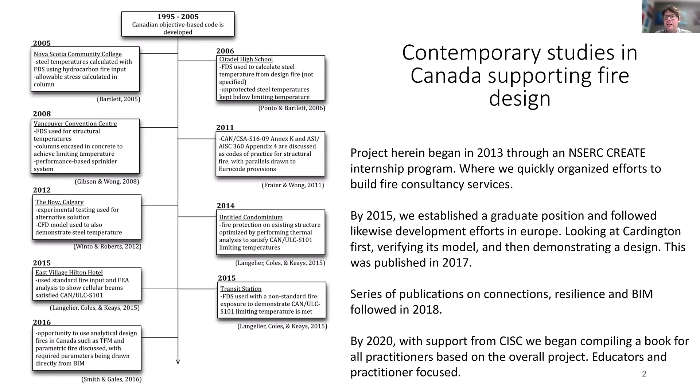So the Canadian Institute of Steel Construction wanted to have basically a textbook created that was basically, here is how you interpret the current codes, here is what you could do with these current codes, and here are some examples of how you could go about doing that. And that's basically when Thomas reached out, it just so happened we use SAFIR to do our examples that would be used within this resource. And the resource has just been submitted to the publisher.

The contents are basically here, and what I'm going to talk about today is a lot about competency, because in the Canadian system, we have to get our engineers up to that level. And then I'm going to talk about the examples we chose to include within this book. So I'm not going to go through the whole book, but it is more tailored towards Canadian engineers and Canadian students. But there's certainly things that you can take away and use internationally.

To talk a little bit about the Canadian Code itself, when we're dealing with steel structures, we're dealing with a standard that's called Annex K, which is actually a mandatory component that you have to follow. I already mentioned briefly that when we do our objective-based code, essentially we have to be in compliance with the prescriptive code still, but we can create an alternative solution.

Basically, we can have something that meets the criteria. So a simple criteria that could be checked is like deflection, the expected deflection that would be coming out of the prescriptive requirement. Are we meeting that in the performance requirement and such?

And one of the examples that I'm going to show today too, this doesn't necessarily mean that you're cutting back structural fire protection. In some cases, it actually means that you're going to have more, which is one of the examples I'll show that comes out of this particular framework.

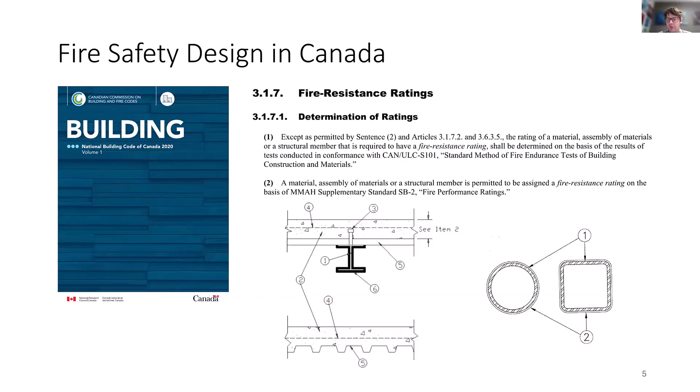The challenge that comes with the Canadian Code, and one of the things that I always get burned on when I do academic papers, is they're saying, why do you keep comparing to the standard fire? And if you've read some of the work that I have about the standard fire, you'll know that I'm very critical about it, but we still have to show that as one of our comparators when we're running the analysis under the system. So the standard fire is something we have to work with. We can use other design fires, but we still have to use the standard fire as our baseline.

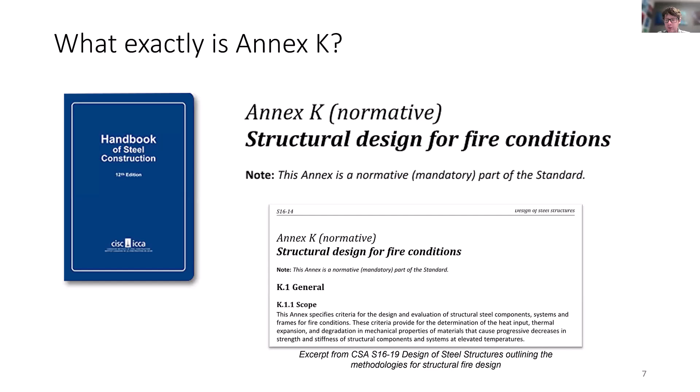So there are a lot of aspects to that. So Annex K is within our steel handbook, and it lays out the procedures of what you can do for Canadian design and the particular bouts of theory that come through. The good news for international people looking at our standards is they're highly based, at least on parameters that come out of Eurocode. So the principles of material factors are all coming from there.

The challenge with the design basis fire that we're dealing with is it is very prescriptive with the standard fire, but it does start getting into parametric fires, and there's a little bit of allowance to be thinking about traveling fires. When we look at the design requirements, there's simple methods that there is some guidance for, and then there's advanced methods. But the annex doesn't tell you how to do it. It just says this is what you have to meet.

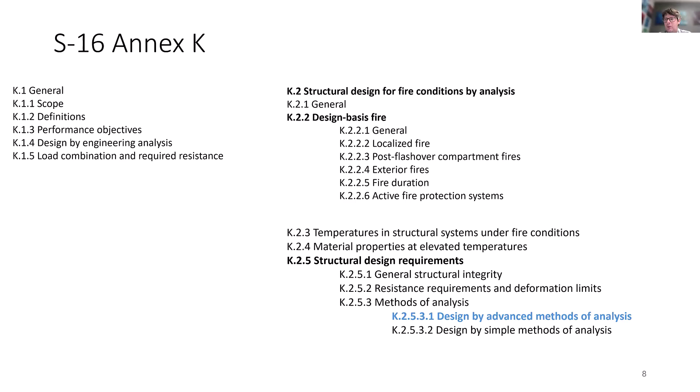So when it comes to promoting fire design in Canada, that's particularly why there's interest by the industry to have published examples of ways that you can do advanced methods. And I'm not going to talk about the simple methods that we've put into the book today. They're very basic, how to do a truss member, how to do a column or something. When it comes to advanced methods, you're getting into membrane actions, bilinear columns, which is the focus of what I'm going to go into today.

We could take a lot of inspiration from the US because there are a number of equivalent resources over there. The challenge that we have in the Canadian system with steel structures and design is it's not necessarily the same motivators for steel that are in the US. We do like to be different, as you would have heard in the news in Canada. And there are different steel trends that happen in a lot of our communities that aren't necessarily the same. There are overlaps with it, but we were trying to make something Canadian specific when it came to this.

So we use SAFIR. And why did we use SAFIR? This decision was over 10 years ago. We started this project in 2013. We sent multiple emails to Thomas asking for advice about using the software as we were going through this journey. And we use SAFIR particularly because of the text inputs and outputs that we could be generating with this, because we had an eye on integrating some of this modeling with building information modeling. I wish we could have gotten far with that, but that was one of our early goals, is we wanted to see if we could keep things open from it.

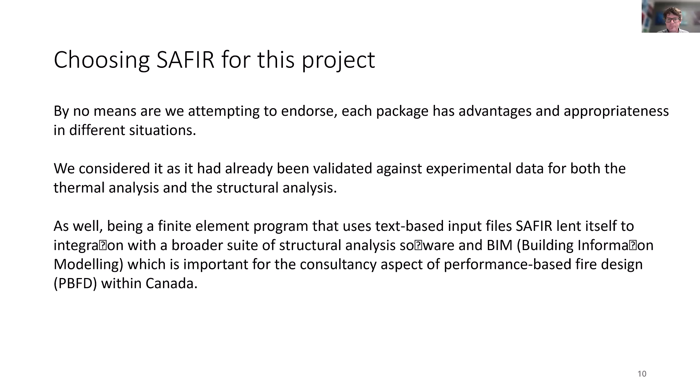So that's why we went this route. And it's not the only thing that you can do with steel structures. The first thing in our book is a benchmark exercise that we use SAFIR for. And a lot of Canadian practitioners really don't know anything about Cardington.

So we illustrate membrane action within the book using the Cardington data. And we illustrate to the practitioners and students that a lot of this data is freely available or can be obtained. So it's not out of reason for people to be trying to do their own verification and validation.

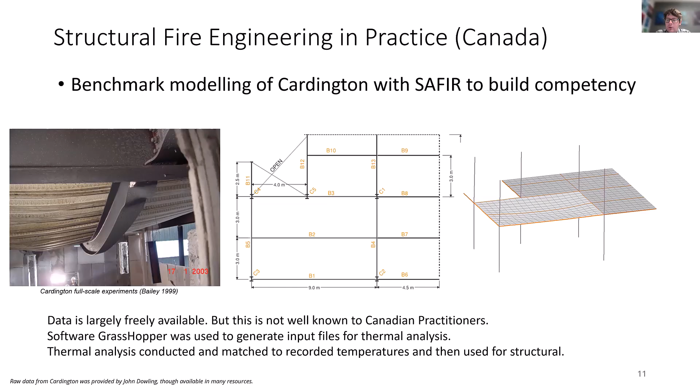It also allowed us to really go into an aspect of what is actually different between Canadian design of a composite flooring system to what you would see in Europe and maybe even in the US. And we have a very different type of rebar mesh that's utilized in Canada that does have implications or potential implications to membrane action. There's a different type of shear connection that comes from the composite system, and even the concrete type is usually very different when it comes to these systems.

So we use the European data, the material data that is coming out of Cardington, and we run a verification validation exercise for people to go through using SAFIR, walking people through step by step of how you would do this analysis. We used one of the corner tests to do this illustration, and we looked at displacement.

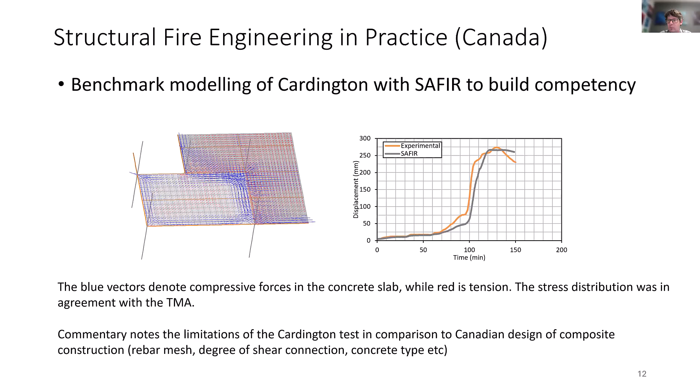There's many things that you can be looking at for acceptance criteria, but for our examples, we kind of focus in on particular acceptance criteria just to show these ones. But there's way more in the actual design that you would look at. We then take it further. We start there, and then we try to show an advanced method.

And this was actually a building that was going to be developed in Toronto. And we selected it as a demonstration exercise because it had principles that came from the UK. It was a British architect who designed the building, but the fire design was a prescriptive solution. There was no performance or objective design in reality. So we knew that you probably could use that here.

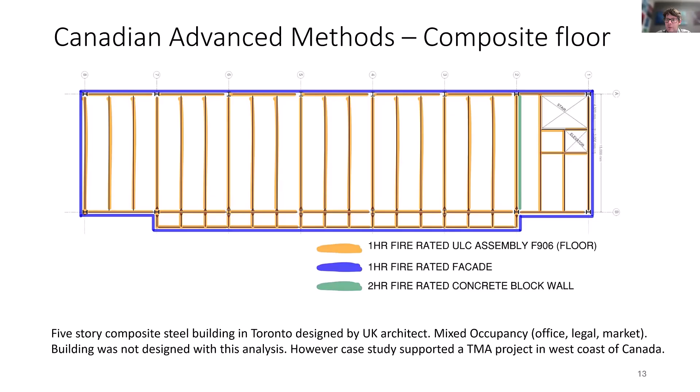And we wanted to demonstrate what would happen if the secondary members of this particular floor plan would have no fire protection coating. What would that mean to the deflection and connection forces that would develop in this particular one, and then show a demonstration of membrane action in the system.

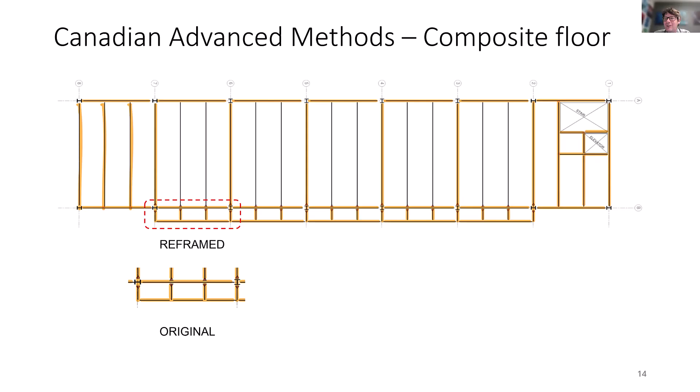It was a very lengthy steel beam. We're talking about a 15-meter long steel beam, so the deflections that are going to be observed are going to be very large. So when you see some numbers here that I'm about to show, don't get that scared. They are big, but the span is also incredibly large.

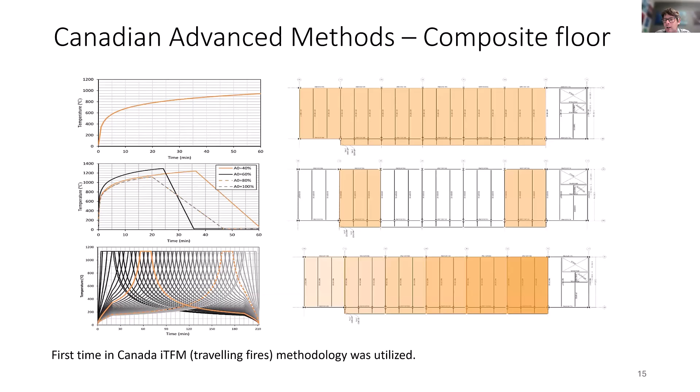We wanted to show Canadian practitioners traveling fires methodologies as well. And at the time, we used the ITFM. We also used parametric fires. And of course, we had to compare back to a standard fire as well. And the book contains basically analysis of the deflection that was coming from these separate analyses based on those thermal exposures that we were expecting to see.

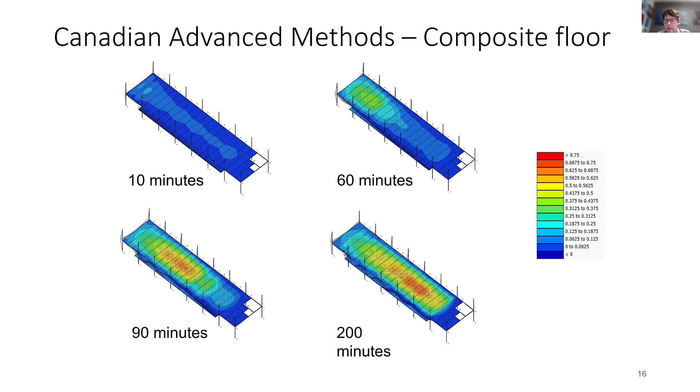And these are some of the parameters. And the connection forces that we observed; our connection is assumed to be very rigid. So we do get fairly large forces being generated. This led to a bit more research with experimental stuff that I'll show as we close this presentation.

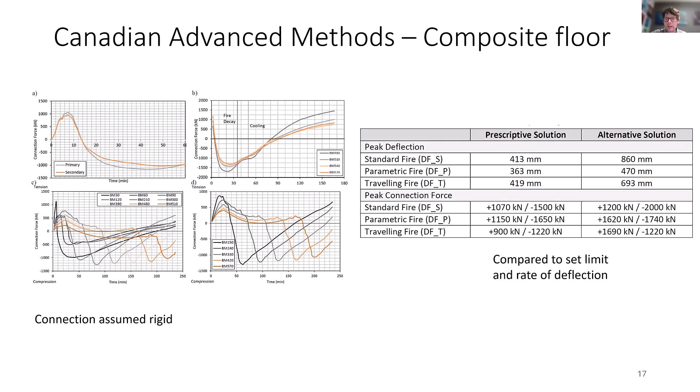The second exercise is actually something new. Instead of Cardington and tensile membrane action... I shouldn't say it's new. It's really that we're behind in Canada, but bilinear columns for a lot of architectural reasons are starting to trickle into the Canadian market, particularly in the Toronto area.

And there was a particular building that was going to be proposed to use these. And we wanted to do an illustration as to what would happen if you did have a bilinear column, because traditionally the fire resistance coatings wouldn't necessarily capture the added axial forces that can be transmitted due to the angle of the system. Now, in these diagrams, the angle is very grossly exaggerated compared to how much you actually have in reality.

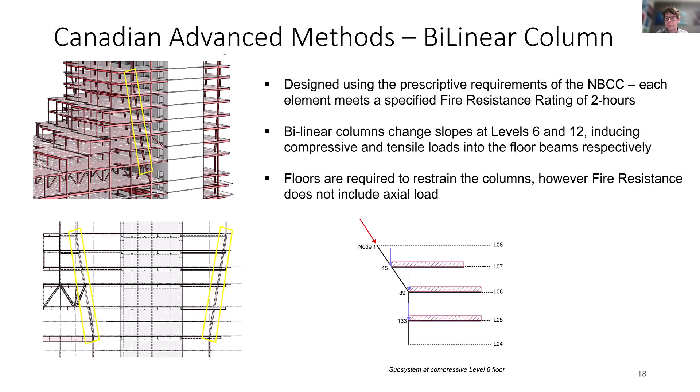And we looked at each floor that had the bilinear columns in different configurations. Ran some baseline 2 hour. This building needed a 2 hour rating. It was proposed to be about 54 stories or so. And we figured based on this particular example, it would be one where you would have to use an advanced solution, but it's likely that you're not going to be removing fire protection, that you're going to have to actually be increasing the fire protection in this example.

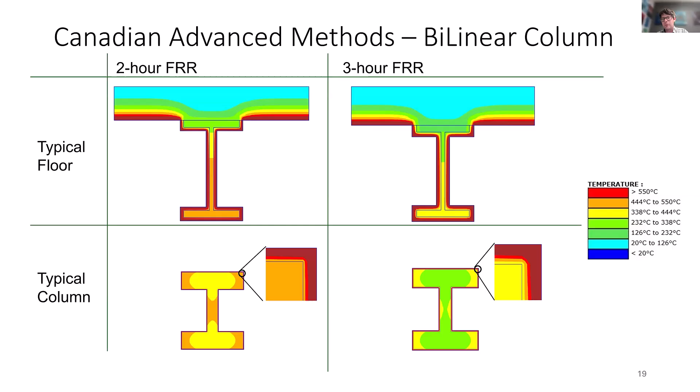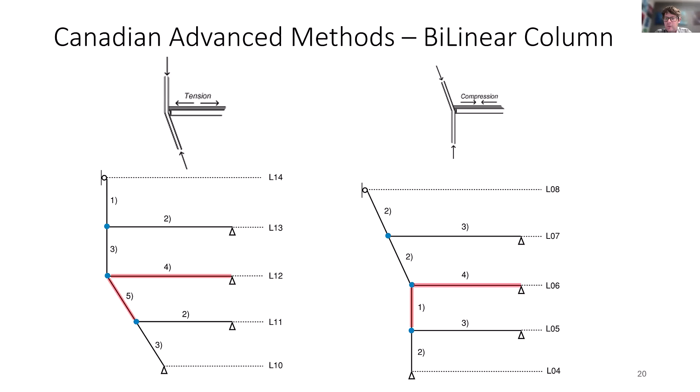And it's kind of a nice way of talking about standard fires and resistance ratings to actually what happens with time when it comes to some of the plots. So we look at the 12th story and the 6th story to look at the particular configurations that are going. And again, in this case, we're looking at the column movement as well as the deflection of the system.

And on a baseline, we do get a failure predicted with the 2 hour amount of fire resistance coating before 2 hours are being met. And then in order to actually achieve the required 2 hour fire resistance rating, they have to apply 3 hours of equivalent coating to the system.

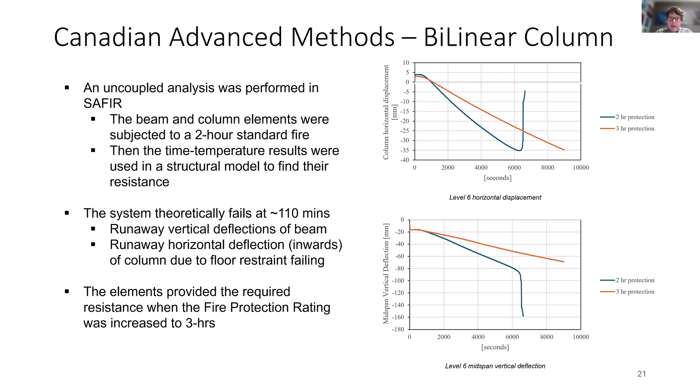So it was a really nice example for the book, not to make people think I'm going to remove fire protection all the time, but there is a requirement that you may actually have to add even more into the system, and educate people that some of these more advanced configurations are going to need that type. And we looked at each floor. In some cases, originally they wouldn't have failed. So it was a pretty good exercise when it came to it.

It led to a research question because bilinear columns actually don't have a lot of experimental data associated to them. So our friends at the steel industry helped us procure some steel. And this project is still ongoing. We're looking at different connection types and different horizontal thrusts onto the systems to see what kind of actual connection forces we observe from the expansion or contraction of the steels in cooling. So it's a pretty robust test program that's still ongoing.

We're using narrow spectrum illumination technologies, which is you illuminate a material with a very high blue light wavelength, and then your cameras have a filter on them that removes color above blue, and that allows you to see through a fire flame to measure things like displacement and strain events, which has some really good modeling implications down the road. So we're kind of excited where that's going to end up, and that experimental program is just kind of concluding.

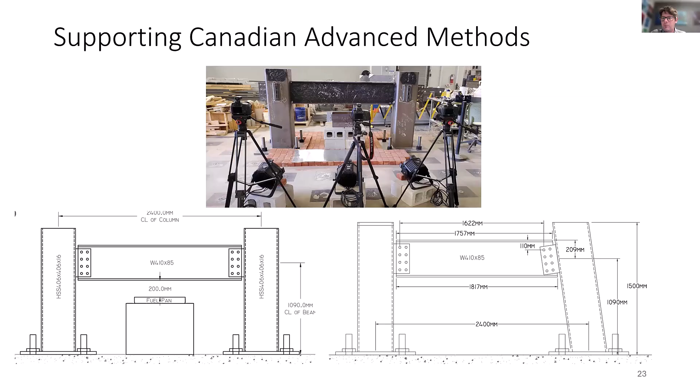The big challenge in Canada is competency. We have a very limited number of fire programs in Canada. We have a good one at Waterloo that my university is very closely affiliated with. There's a program in Carleton, and then outside of that, you just have a very few number of courses that are happening. To train students, it's a challenge. So having some resource documents for people is really important.

Within Canada, at least, we have a very high regulation of professional licensure. If you want to undertake fire engineering and design, you actually have to show that you have some level of training in it. Otherwise, you can actually be fined for professional misconduct. So there's some safety nets in there for competency, but definitely it's a very big thing that has to happen, especially as you're trying to grow parts of this industry.

There's contributors to this project within the book. There's a fire modeling review of different techniques for steel. Chloe is running the experimental program. Panos Kotsovinos performed the peer review of the book. Our steel comes from Benson Steel, and our funding comes from the Institute of Steel Construction on this particular project.